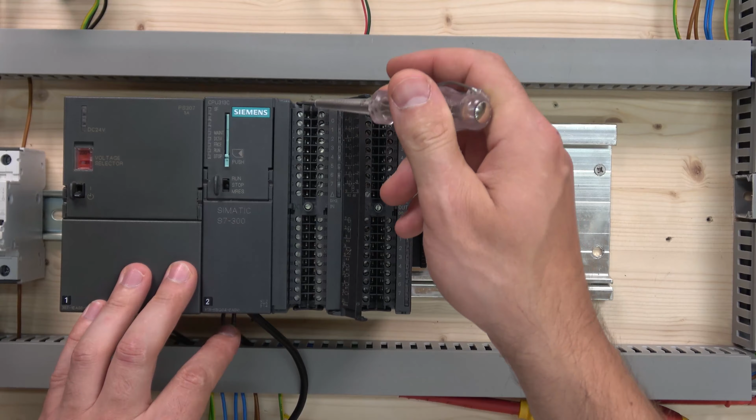So next one we have a CPU, but this CPU is like a combi unit. So you can see this one in here. This unit in here is one unit, and then it comes with pretty much everything that you would normally need, because you can see in here, this one right next to it, I've got my analog card with some digital inputs in here. There's all sorts of different analogs in there. We're going to be checking them out in the future, and also have digital input and digital output.

And obviously the CPU has one MPI port, and it's got 24-volt DC supply right there in the bottom. And of course it's got this memory card in it as well that would store the program for us.

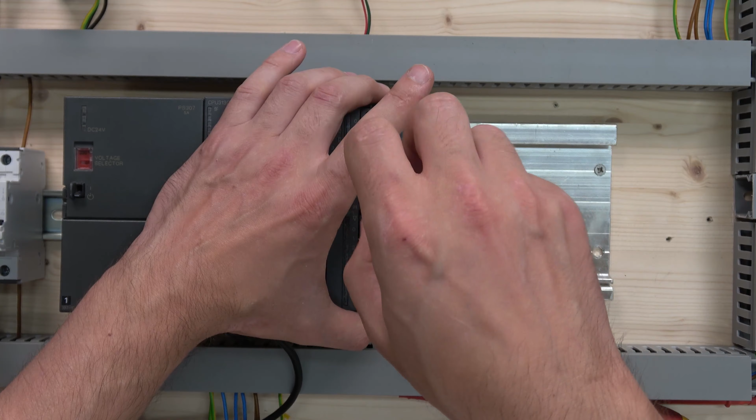So as you can see already, the cable we're going to be using for communications is going to be a PC Adapter USB A2. I do believe this is the last release they released for these CPUs. I don't think there's newer ones out there or different ones. There's older versions of different kinds, but not this kind. So yeah, that's what we're going to be using. This is the converter from serial to USB, which is very, very easy to set up within TIA Portal, which we're going to get to in a minute.

So before we get started, let's have a look. So you have this option in here that you can remove these connector blocks. If you haven't seen it, I'll show you. So if you ever need to replace the unit, you don't need to dewire anything. You just unplug it and you plug it back in. Quite straightforward, pretty cool. I like that. Most of the manufacturers do that. So easy removal, because who wants to do the rewiring?

And after that, this is that kind of block, which is 32 pin for 32 points. And then we have a digital input card in here. That's the one we're going to be adding in a minute. And this one's got 16. And that one removes literally by clicking a button, and it comes out fairly easy, straight away. So that's the one we're going to be adding on our system for our future little projects that we're going to be working on.

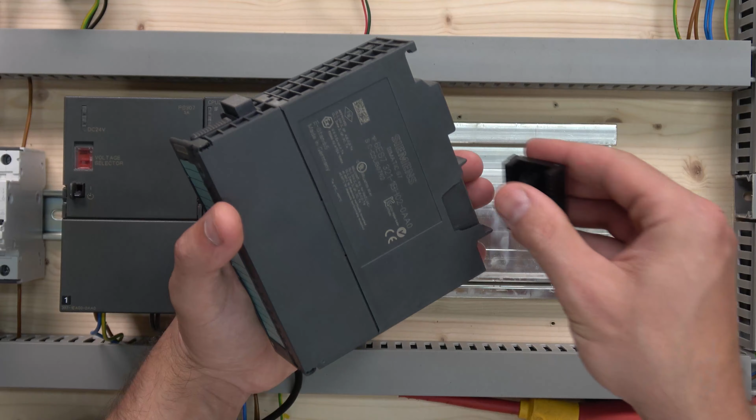And also you can see down there I have a pin in here, like a joiner block. That's what connects this card with this card, pretty much marries them all together. Mainly for communications, there is not that much power going through it. So because we're going to be adding another card, we're going to add another one in here, so we can prep ourselves for the next card as well.

And also, if you can't be bothered with the screws, you can get the blocks with the push-ins like that, and the same removal in here, comes off like that. So let's remove that one, because I'm not going to be expanding at this time anymore. So we're going to add this card into it as well. So here we go. So this is our setup in here.

So if we power it up, and I know on the configurations, this unit in here is fully configured just to be this unit, but as you can see, it's not going to come up with any SFs, but that does not mean that it recognizes these two cards. So that's something that we need to go in the TIA Portal and find out, and then make sure these are configured to be recognized by this CPU. At the moment, if I remove the card, it will go into SF. But if I reset it and put it back in run, as you can see, it will clear the error and say that it is okay within the CPU.

And if I add it, there we go, then it does the same thing. It goes back, it goes in SF. It sort of detects when the card gets added or removed while it's powered, but it doesn't do the configurations for you, because that's something you need to do yourself within the TIA Portal. So that's what we're going to be looking at right now.

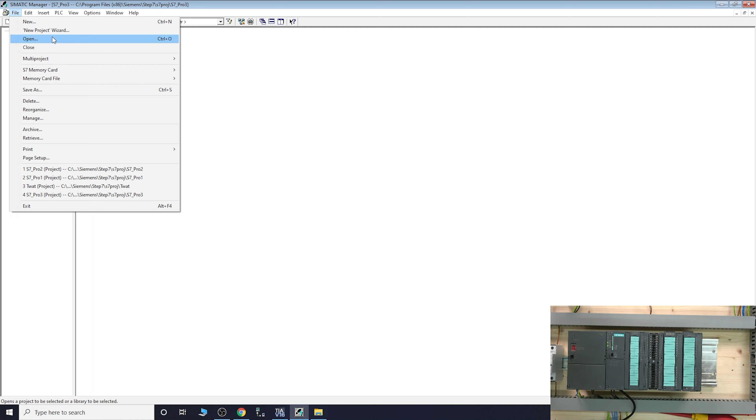I think you need TIA V13, and again, if you bought the V16 professional, you automatically have access to all the older versions as well. Not the newer versions, but you have access to all the older versions free of charge. So this is Simatic Manager in here, and this is the old way. This is the old program that used to be used to program Siemens 300, 400 series PLCs.

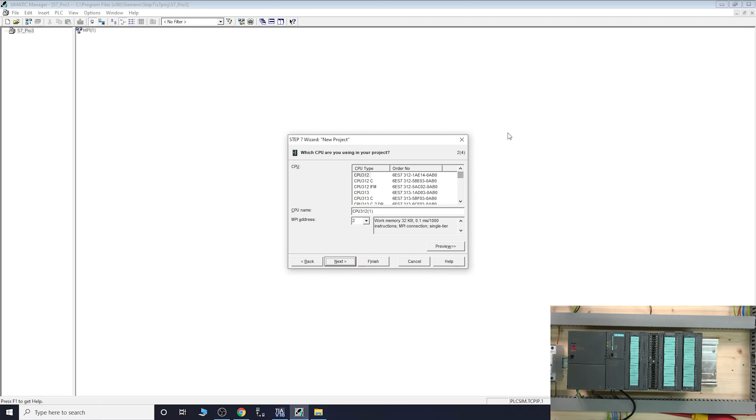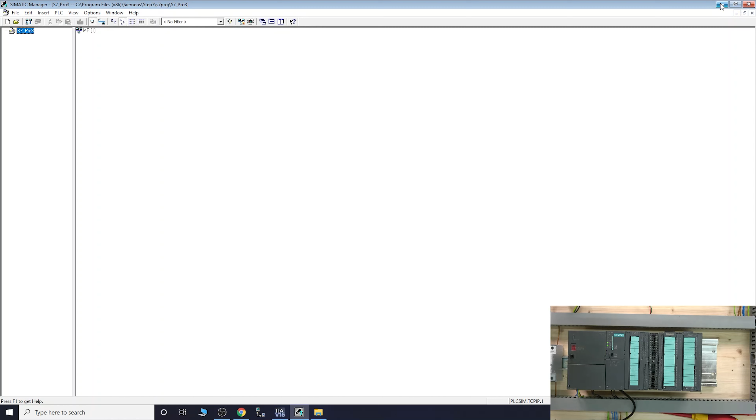And if you go into the CPUs, you can see there's a whole list of CPUs. And believe it or not, of all the CPUs I have, I've got about four or five of them, I have none of them on this list. So this just indicates how old some of these CPUs are. So if you do need it, your TIA Portal will literally pop up a message of what you need to do if your program cannot be uploaded from the PLC.

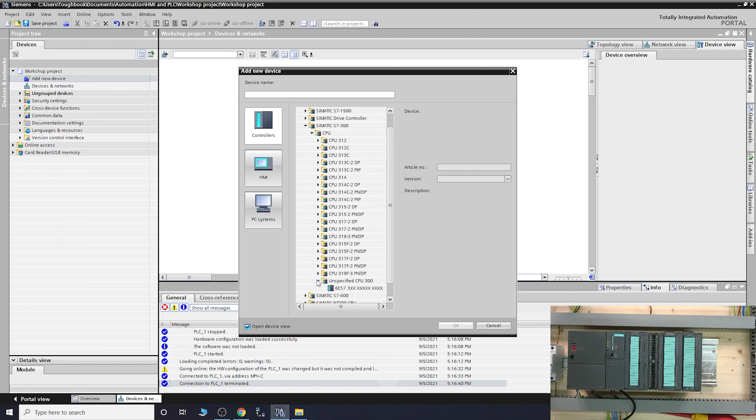So yeah, in rare cases you will need Simatic Manager for you to move forward, and then you need to migrate it, and then you need both programs. It is a bit sketchy. I haven't got any of the Simatic Manager programs so I can migrate it. But if I do get it, I'll definitely make a video of it. So, having said that, let's go into TIA V16 and get ourselves all set up and ready to go with this.

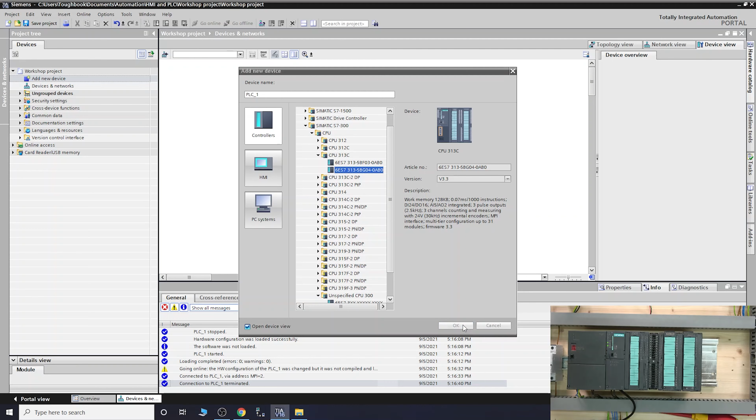So first thing we need to do, we need to add a device. Add a new device, and then we're gonna go into the CPU. As you can see down here, right in the bottom, it actually says it's an unspecified CPU. The S7-1500 and 1200 series PLCs you can actually detect. This one doesn't have the detection for it, so I'm not sure what that is there, but anyway.

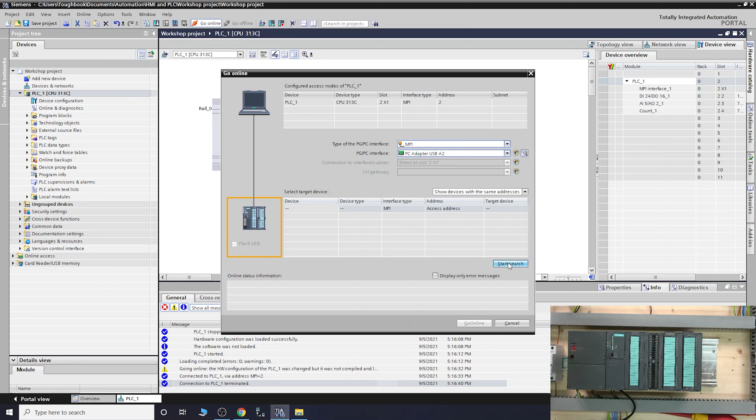So the one we're gonna use is CPU 313C, which is 5BG04. I'm pretty sure that's 5BG. That's our CPU right here. And it's got a set firmware version, so let's do this. And it will open that into what they call the project itself. So once we are in the project, now that we have got the main CPU, we are able to download the actual program out of it.

So what we're going to do in here, we're just going to go online, select how we're going to go online with the MPI, and it's going to be PC Adapter USB A2, and then we have to search and let it find the PLC. Here is our PLC, CPU 313C. Let's go online. We're going to get the program out first, and I'm going to show you some tricks, some ideas how you can diagnose what is going on with your PLC if some things are not working.

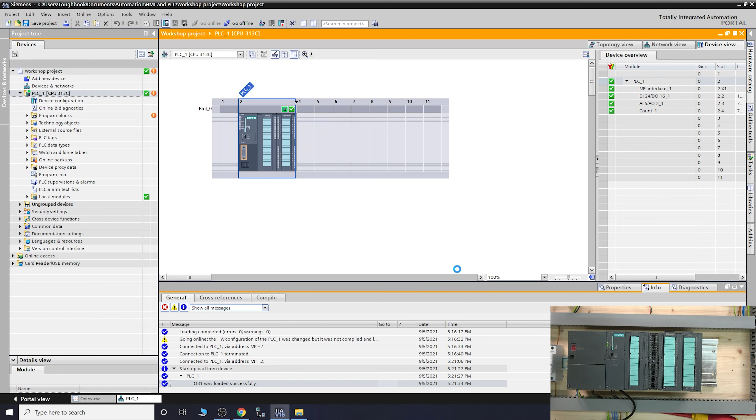So yeah, and then as you can see, this upload from device has lit up now, so it says you are able to do that now. So let's go into it and do that. So get the program out. So here we go, upload from the device. Quite straightforward. They made it really easy these days. That's what I like about Siemens. They look into the future and get things updated properly, so it makes it easier.

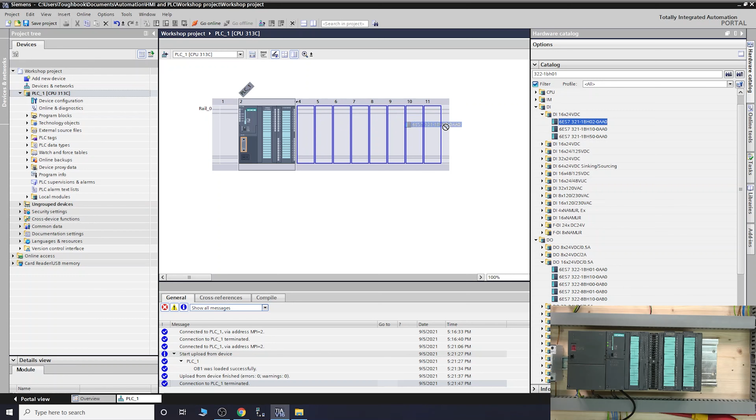So let's go offline now. What we need to do is add those two cards now, the ones we just added. We're going to go to the hardware catalog, and I already opened them up in here, because usually all you need to do is put your part number in a search, and it will find exactly the card for you. So our digital input card is 321-1BH02. So that's us, and as you can see, all the blue ones light up. It shows you where you can place it. So we're going to place it right there.

And same thing we're going to do for a digital output, and I do believe our digital output was the 322-1BH01. So that's the one in here, and we're going to put that one in there. So now, as you can see, the CPU is not really showing us any errors. It doesn't say there's any problem.

So if you want to find out if your cards are in it, add them into your project window, the device view. In there, you can add the cards in and then go online. Once you go online, you'll be able to see if the cards are configured within the CPU or not. As you can see, mine aren't showing. In here, it shows not reachable, so the cards are not configured with the CPU. So that's what we need to do.

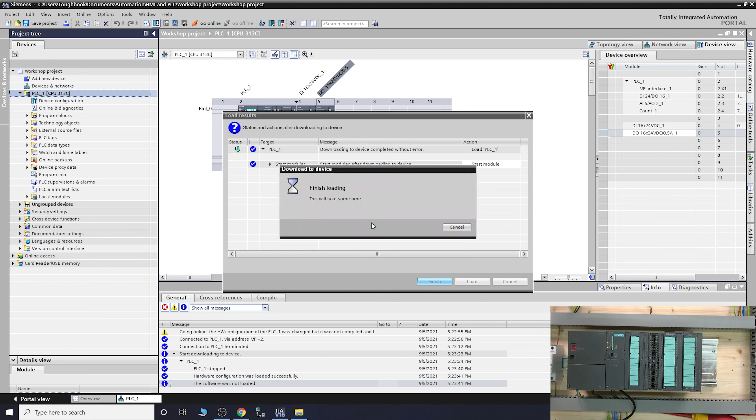So we're going to go back offline now, and then go onto the CPU, and we're going to save. Now that we already got the program out, we added the new cards. So we're going to pump all these configurations into the PLC now. So here we go. It's compiling everything, getting all ready. There you go. All happy with that. So let's load it in.

That is done. So now let's go online. Let me finish it up, and then we're going to go online and make sure that it's all singing and dancing. So let's go online, and if all goes well, all of them should have a green tick and it's happy dappy. And there we go. So our system now is fully set up and ready to be worked on, so pretty much start programming. From there on, it's pretty much to give you ideas if something new gets added to the system.

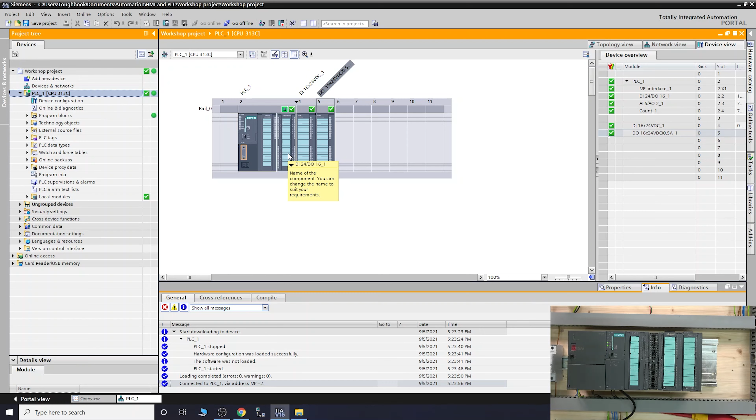Actually, let's get back onto the CPU, and I'm going to show you a couple of things to look out for if you're getting some SF faults. An SF fault often comes from hardware configurations or hardware missing. Very often some hardware somewhere gets lost or burnt out, or something happens to the hardware, and SF comes up, and then you need to find out which one is actually missing. So let's jump back onto the PLC and have a look at some of the faults you could possibly have.

So what we're going to do in here is simulate a possible fault. One of the common faults is when the card goes dead, so basically the card becomes faulty and no longer functions. And when that happens, let's say I move one of the cards up. As you can see, the card just got disconnected. In your case, it could have been the card gone faulty or dead or no longer responding to the CPU. You will receive an SF error.

It's one of the errors that can come in via the SF, and the only way really for you to find out is to connect the software and have a look at it, unless there's an HMI that is able to display the problem to you.

Because really, as you can see down there, you can't really see what's going on unless you know that there's a light right there not supposed to be on, and they're not. And so again, it's all a guessing game. But the best way to do it is connecting to the laptop. So let me just push that back on.

So you can see it's not resetting yet because it requires a memory reset. So let me move my video down now because I'm trying to go through OBS still. So you can see I've seen an error in here. So once you load up your configuration, hopefully you do have a source file and you can just load it up, go online and quickly see it.

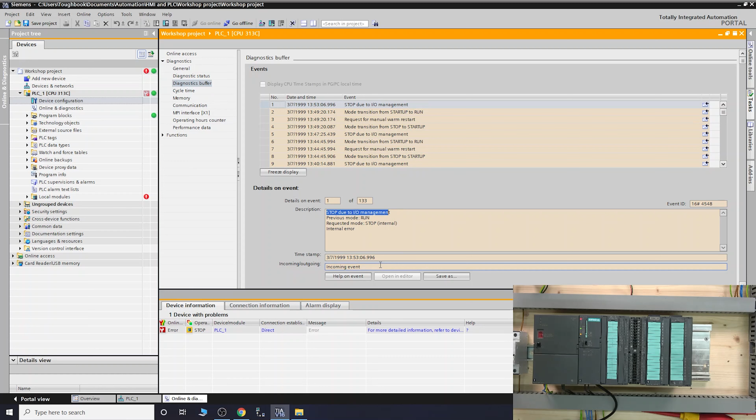So as you can see, by clicking for more information on here. So by the way, click on Diagnostics. If you click on that spanner, just click Diagnostics if it's not on there. So as you can see, IO module stopped. Stopped due to IO management, sorry, and here we go. It's just the first one in here. Something has happened. If you want to learn a bit more about the event, just click Help on Event.

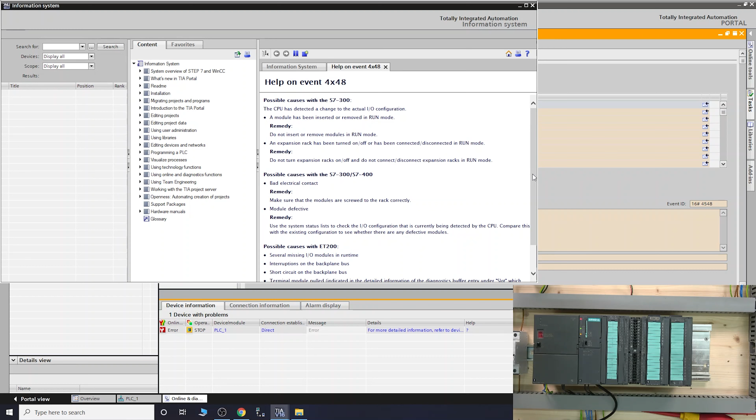Sometimes it takes quite a bit to open up. So let's wait for it. Because it's a massive piece of information. It's like a huge PDF, I would call it. It's just an information system, or system information, I would call it. So it's basically going to take you straight to this sort of explanation about these faults.

So as you can see down here, the CPU has detected a change to the actual IO configuration. A module has been inserted or removed in run mode. And you can read up: bad electrical contacts, make sure that the modules are screwed in or racked correctly. And it sort of gives you the most common problems that could be causing this kind of error.

So yeah, the best thing is to have the TIA Portal handy, and of course the professional version would work very well. By the way, you can get one just in case you're running into serious trouble and you really, let me reset this guy, really need to find out what's going on with your system. You can do that. You get a 21 days trial you can get from Siemens, but you do need to get in touch with Siemens for it.

So get your system running. Yes, it's a 21 days free trial of the professional version. After that, unfortunately, you will have to buy it. So there we go. So we're going to reset, going back online. System should be all healthy and singing and dancing. And there we are. And that's it, ladies and gentlemen, for today.